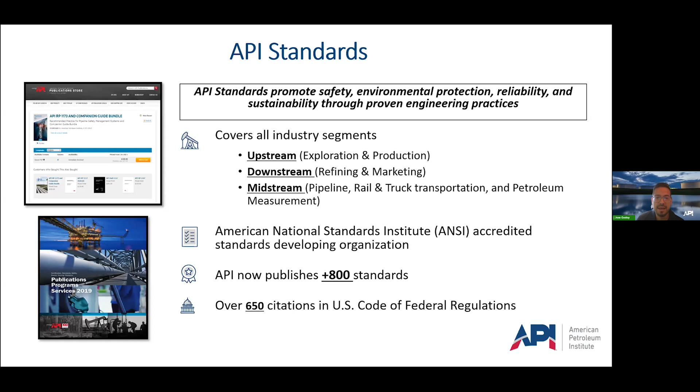We are also accredited by the American National Standards Institute, ANSI. We published so far over 800 standards with over 650 citations in the U.S. Code of Federal Regulations. Now, why is it important? Why do we emphasize participation?

One, because it gives companies a voice in the development of a standard, sort of a seat at the table. It allows experts to network with other experts and learn from their experiences, sharing lessons to prevent issues before they occur. You also get access to early information. So if you're part of the committee, you get to know how a standard is written, the position that that standard is going to take. You use knowledge to demonstrate compliance also with other industry standards and to your customers or regulators. And it's an opportunity for company personnel to gain expertise through consistent participation.

Now, the standards development process. Our standards development process is transparent, which means that anyone can participate and comment in a ballot that is opened. It's impartial, it's fair and just, and we incorporate balance and due process into our standards development. And it's consensus-based, meaning that any action taken has to be made by substantial agreement.

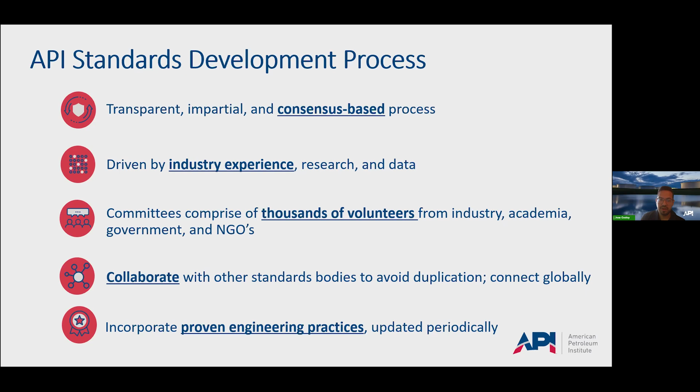Our process is driven by industry volunteers, experts that provide research and also provide data. Thousands of volunteers from operators, academia, government, NGOs. As long as you have a material interest in that particular standard, we welcome you. We collaborate with other standards development bodies to ensure that there's no duplication and that we connect globally. And we incorporate proven engineering practices that we update periodically. Now, just to talk a little bit about the documents that we have.

Before I talk about the individual documents that we have, I want to make sure that I'm clear with how we use the term standard. We use the term broadly, but what we're going to talk about now is our actual document designations and how each document is developed. And I want to also emphasize that there's no structural hierarchy with any of the documents I'm going to talk about now.

And then compliance with industry standards. All of our API documents are voluntary. They only become mandatory if they are codified by federal law or by a jurisdiction, or if they're part of a contract between two parties, say a manufacturer and a purchaser, or if they're part of a company's compliance procedures. And as I mentioned earlier, the document designation does not determine compliance. So we always encourage users to refer to the national and local regulations for that.

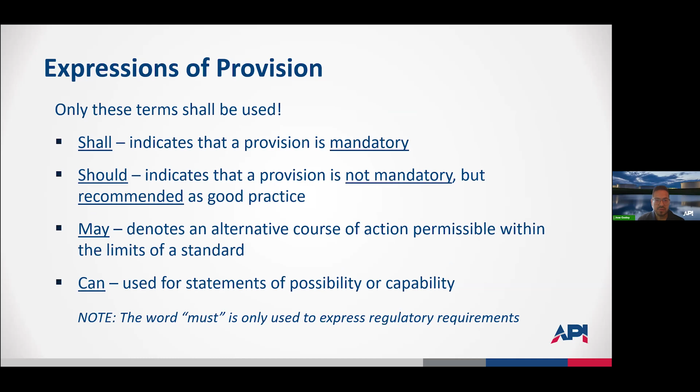The balloting is conducted using the API electronic system. Usually a ballot is open for 6 weeks, and it's distributed to the consensus body and everyone that has material interest in that document. Information on accessing copies of the ballot draft and submitting comments can also be found on the API website. And as I mentioned earlier, only one vote is allowed per company.

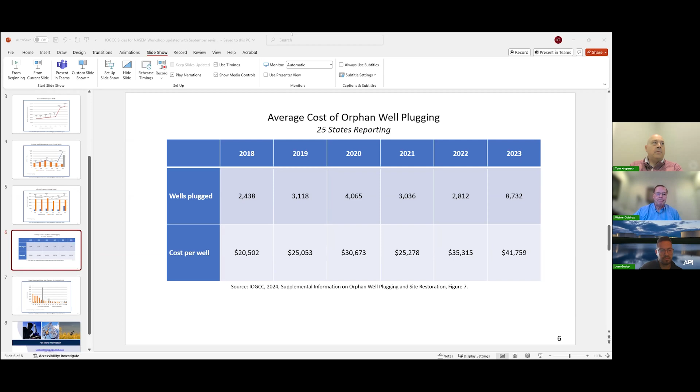Appreciate it. Thank you. David? Yeah. Hey, Tom. Thanks for presenting. I know you weren't here yesterday, so my question is kind of related to the previous one; it's around cost and presenting average costs.

We had Luke Plants, who is the P&A contractor, speak yesterday about the concerns when you go out to bid on a fixed rate basis when not all wells are average, right? So a well in Kansas is 800 feet, simplistic, versus the complex wells. So the contractor starts to take on that additional risk. And then the concern is, are you really getting adequate abandonment at the end of the day?

So my question is, does IOGCC break that down into other buckets, from simple low complexity wells to high complexity wells that are more expensive, but you get a bigger bang for your buck because you're reducing more risk, maybe more methane exposure and things like that than the other wells? So whether IOGCC has that kind of breakdown in data, or should we be tracking and trying to bucket the average cost to help better depict the overall cost exposure?

Good question, David. These numbers do not go into that level of detail, but it is something that I think some states look at and understand. Especially if you're doing a turnkey project, on those difficult wells it may be difficult for a contractor to get it done when you find unexpected issues, which is pretty common on an orphan plugging project. An example of that in Wyoming: we plug some of our orphan coal bed methane wells for $3,000 to $5,000. Our most expensive orphan well to plug to date is $500,000. So it can vary widely even within a state depending on the type of wells.

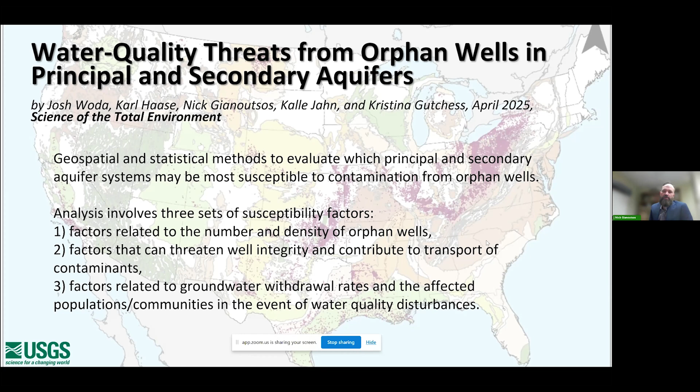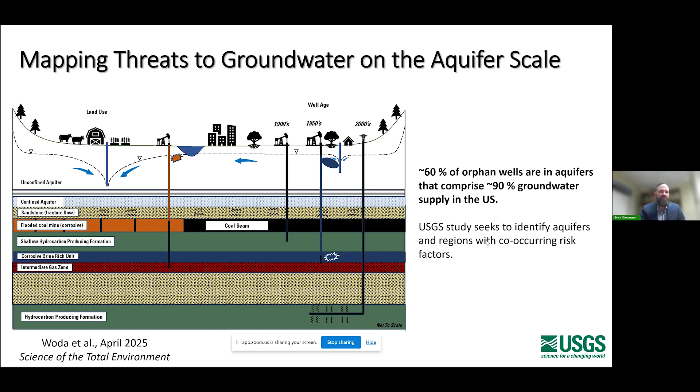We look at different susceptibility factors, including the number and density of orphan wells in each aquifer system, different factors that threaten well integrity, and also human factors like groundwater withdrawal in affected communities and populations. One of the key findings of our study is that approximately 60% of the orphan wells in the United States that we know of are in aquifer systems that comprise 90% of the groundwater supply in the United States. So 90% of our groundwater is where 60% of our known orphan wells are located.

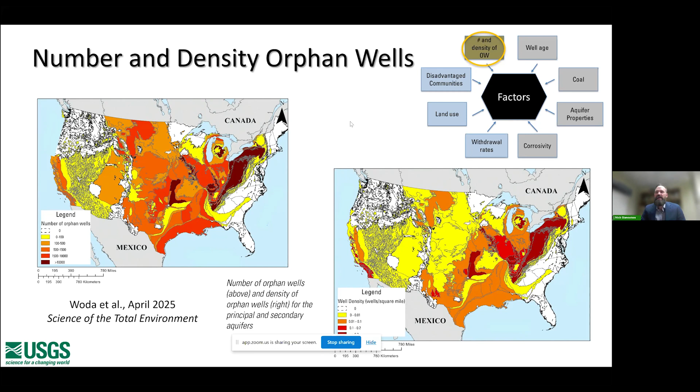And what we concluded is that the Pennsylvanian aquifers in the Appalachian Basin have the highest number of risk factors, which isn't very surprising because that's where the oldest wells are. That's where some of the largest volumes of wells are located. There's a lot of coal mining and other factors in the area.

A number of aquifers in the central part of the U.S. are actually lower risk based on these susceptibility factors. And then the blue, the yellow, and the purple aquifers are kind of a mix based on the different susceptibility factors. And so when we publish this study, it's kind of hard to tell which factors are the most important. So we introduce the data in a way so that the reader can decide which factors you think are most important and then see which aquifers line up with that.

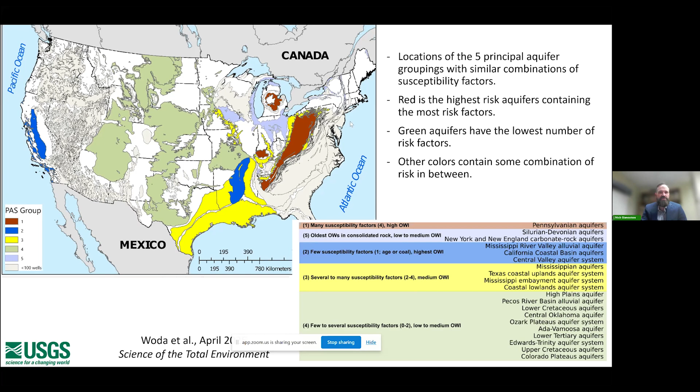So I want to thank Josh Woda for being the lead author on this study. He did a really excellent job, and we're excited to present it to you guys next week.

Okay, so last time I spoke in front of the committee was at the workshop in Washington, D.C., and I presented a new data set that we had just published. It's the groundwater quality near orphan wells. This data set is a combination of orphan wells and groundwater quality measurements from the National Water Information System of the USGS. And we look at things like total dissolved solids, chloride, bromide, different characteristics within the water quality measurements.

And so what we've done is we've created from that data set an online tool for the user to go in and to evaluate the data. And I'm going to give you a quick demonstration of that today.

Okay, hopefully you can still see my screen. Yes, we can. All right, thanks.

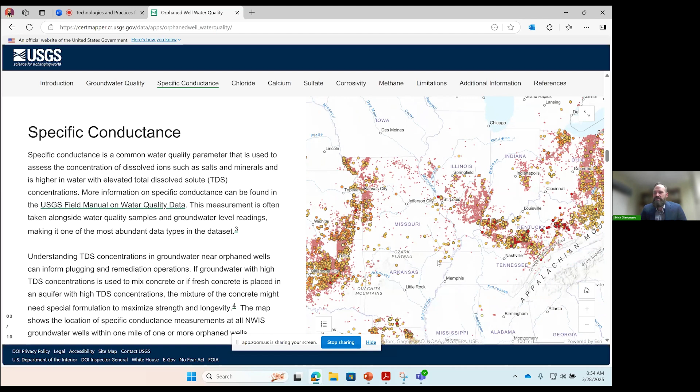And if you click on those points, you can see all the parameters of the different groundwater measurements that were taken. And then we've pulled out a couple different parameters for mapping. So we look at specific conductance across the US in this data set. You can see where total dissolved solids are higher and lower. We also look at chloride. Chloride can affect the deterioration of the wellbore over time.

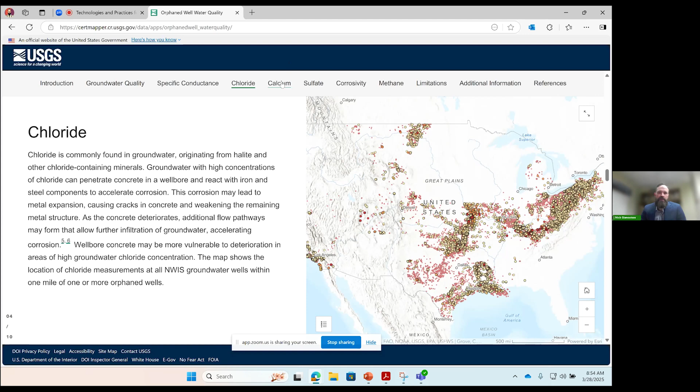We look at calcium. Calcium in groundwater is important for setting plugs because it can affect the timing of the curing of the cement in the plugs. And then lastly, we look at sulfate across the U.S. Sulfate can wear down concrete or cement over time and cause a deterioration of the well plugs.

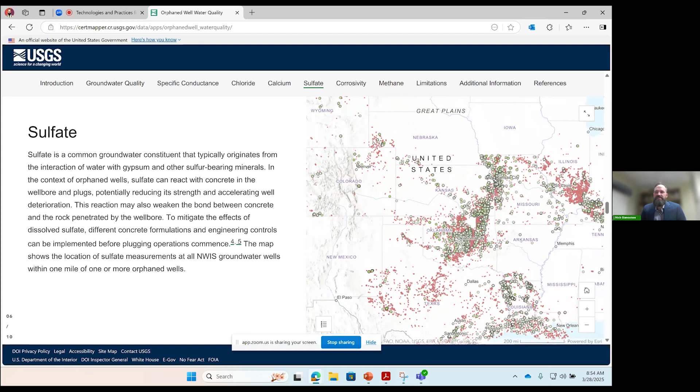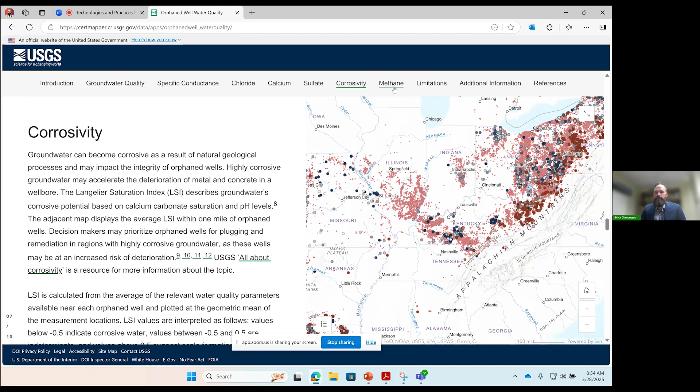And then we look at the Langelier saturation index to see what parts of the country are more corrosive than others. Well bores in these areas with the red dots are going to corrode at a faster rate than well bores in other areas of the country. And then the last thing we look at is methane in groundwater, areas where we're seeing higher amounts of methane.

Finding methane in groundwater does not indicate that that methane is coming specifically from an orphan well. There are natural sources of methane and other causes as well. But we hope that as researchers, policymakers, and well pluggers go out and are doing work across the country, this tool might be useful for you, that you can go in and see what these different parameters are and help you make decisions.

And then the final thing I'm going to talk about today is for this panel on monitoring and remediation. Noel had sent us some questions and some topics that the committee is interested in. And so I'm just going to highlight a couple of these in bold here. So the committee is interested in seeking information on long-term protection of the environment, specifically groundwater and methane emissions and public health and safety.

Some specific questions include what subsurface factors are most pertinent relative to failed wells, what strategies have been employed to mitigate them, groundwater monitoring, if well remediation is needed, how should it be done, what about post-plug monitoring? And so these are complicated questions. I wish I had simple answers.

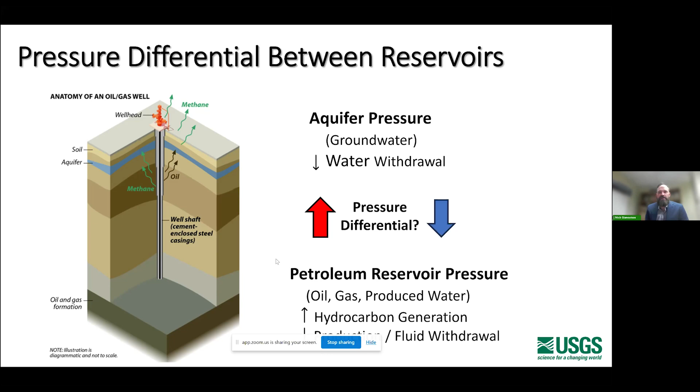But if we have a normally pressured aquifer and we've had a lot of production in a petroleum reservoir, there might actually be situations where the water from the aquifer might start draining or leaking down into the petroleum reservoir. And this can change over time as production occurs and groundwater withdrawal also occurs. So it's an extremely complex environment to try to understand and study.

Perfect, good. So Nick very nicely teed up what I'll present today, which is kind of a case study, but I hope that there will be learnings that are useful for the committee and the public, and that might be a bit more broadly applicable. So my name's Katie Smye. I'm the principal investigator for the Center for Injection and Seismicity Research, which is an industrial associates program at the University of Texas at Austin. And what I would like to talk about today is challenges to orphaned and abandoned well integrity from wastewater injection specifically. I'll touch a bit on some of the tools that we use to monitor surface conditions and what that tells us about the subsurface, and what we can learn about the effectiveness of plugging and remediation strategies.

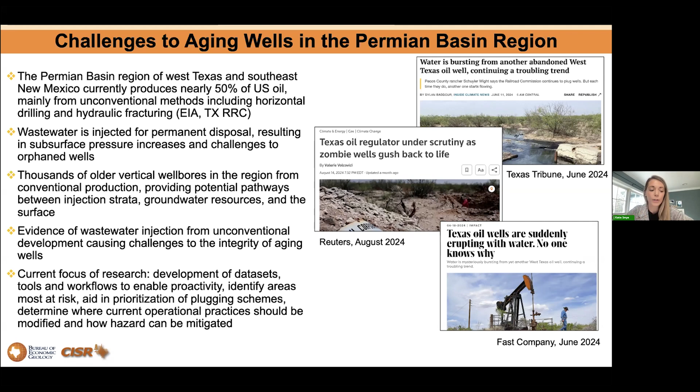So in terms of what's happening in this basin, a little bit of background, I won't spend a lot of time on this, but you'll be aware that in the Permian Basin, which has two sub-basins, the Delaware and Midland basins, and an uplifted Central Basin Platform, there's a long history of conventional oil and gas production, and I'll show some of those maps of those wells later. That production peaked many decades ago and has since declined.

And the footprint here of unconventional produced water differs from the footprint of conventional produced water. That was conventionally typically not a huge challenge for orphan and abandoned wellbore integrity because that produced water was re-injected into the same reservoirs it was produced from for enhanced oil recovery. So this is kind of a historically pressure-balanced technique for managing water production. In the unconventional reservoirs, they're injected into other strata, and that poses challenges for pressurization in the subsurface.

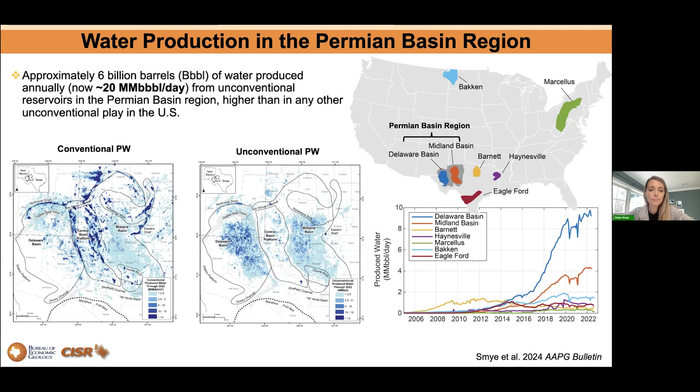In most cases, for every barrel of oil produced here, we get 3 or 4 barrels of water, but in some areas, 90% of the fluids produced are this wastewater. And this is not particularly clean water. It has to be very heavily cleaned to do anything beneficially with it. It's many times saltier than seawater. It contains radioactive materials. It contains organic compounds. So this is not something that you want necessarily sitting on the ground surface. So that is re-injected historically into deep reservoirs.

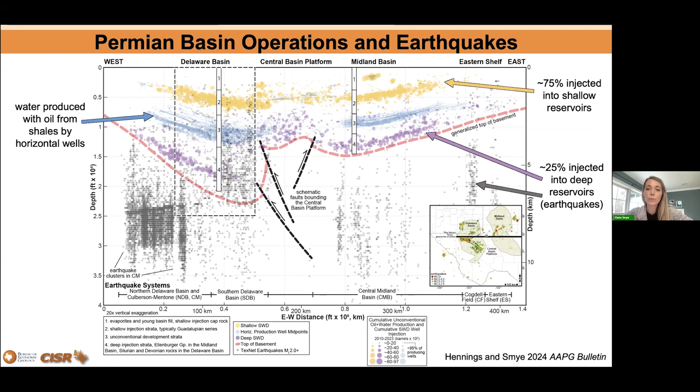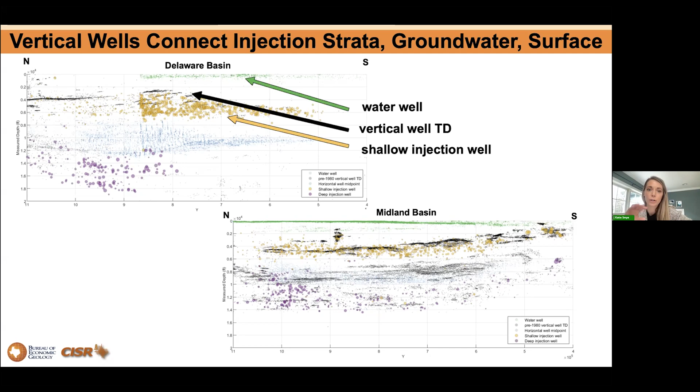in structural traps on the basin margins, there are a population of wells in the footprint of current day unconventional production and water injection. And many of those are in the depth range of current injection, 3, 4, 5,000 feet in the shallow strata. And many of them are of a vintage 60s, 70s, and 80s that might be of concern for being potential compromised integrity locations.

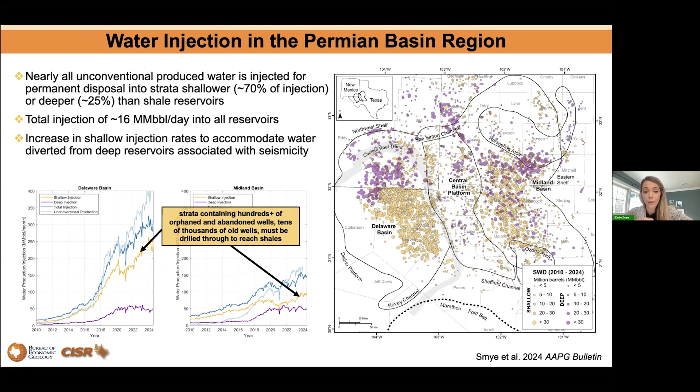And to just put that in a useful kind of context, if that injection was spread out across every minute of the day, we would see an Olympic-sized swimming pool every minute and a half or so injected in the subsurface of this basin. Every hour of every day of the entire year. So you can understand the vast volumes of water that are going back into the subsurface here and coming into contact with well bores that were not cased or plugged either at all or to modern day standards.

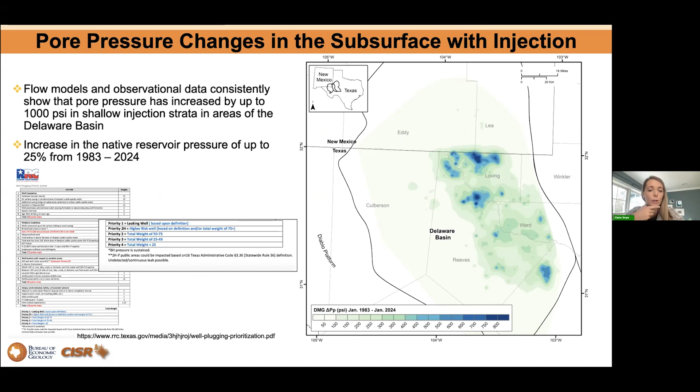And I just threw this up there during the earlier morning sessions today, the plugging priorities for Texas before I bring up the next slide. There are a range of factors that are considered in prioritizing plugging, but what I want you to see here is that priority one wells for plugging are wells that are actively leaking at the ground surface, either methane or in most cases, produced water. So priority one wells we know are actively leaking.

And so with our pressure maps, I wanted to show you we did a study on several hundred orphaned wells in Texas based on the Texas plugging priority by the regulator. And you can see in black dots, many wells don't have a priority at all.

They're not currently prioritized for plugging, but there are a population of wells that are priority one for plugging. Those are the red dots. And when we compare that to our subsurface shallow injection pressure model, we can see that leaking wells have experienced an average pressure increase of more than 200 psi.

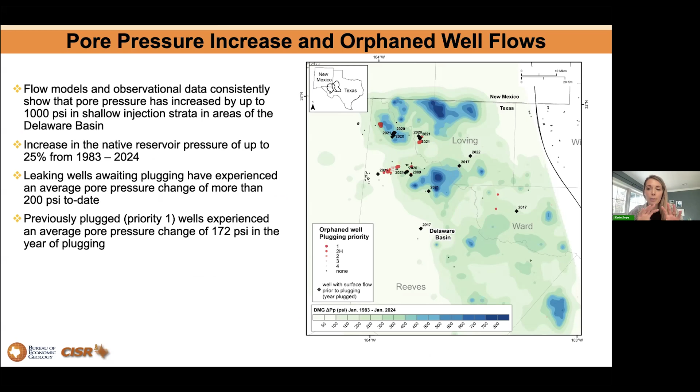And when we layer on wells that were previously plugged, and here I have the year of plugging for each of those wells, these are the wells that are black diamonds, they did experience an average of 172 psi pressure increase in the year of plugging. So it's clear here that there is a link between this subsurface pressure increase and leaking orphaned wells produced water at the surface. But building those geological models and pore pressure models is extraordinarily complex, takes a lot of time and data and man hours.

So we're looking at other techniques now to monitor what's happening in the subsurface and potentially highlight areas of concern. And so one of those things is InSAR surface deformation data. And this is gleaned from the Sentinel satellites that pass over this region of West Texas every 12 days or so. And they can monitor the elevation of the ground surface. And we can calculate over a specific time period how the elevation of the ground surface has changed.

So the map I'm showing here, you can see two paths stitched together. There's a line between the two basins, but it shows the change in ground surface elevation from 2015 through 2022 over this 7-year period. Purple areas are where the surface is going down, subsiding, and orange areas are where the ground surface is coming up or uplifting. And in general, there's a signal of subsidence. That's because we're producing, as Nick mentioned earlier, fluids from the subsurface. And like sucking something out of the ground with a straw, you're removing the fluids and there's compaction of the reservoir and the ground surface goes down.

But if you look closely, you can see there are some areas, particularly right here along the Texas-New Mexico state line and other isolated areas as well where we see uplift of the ground surface. And those are areas we think where shallow injection pressurization is so great that it's overcoming that signal of subsidence from production and causing elevation of the ground surface to go up. And these are the areas where we have concerns about surface flows from orphaned and abandoned wells. So I want to show you just quickly two case studies and how we're using this particular tool to monitor the subsurface and what's happening.

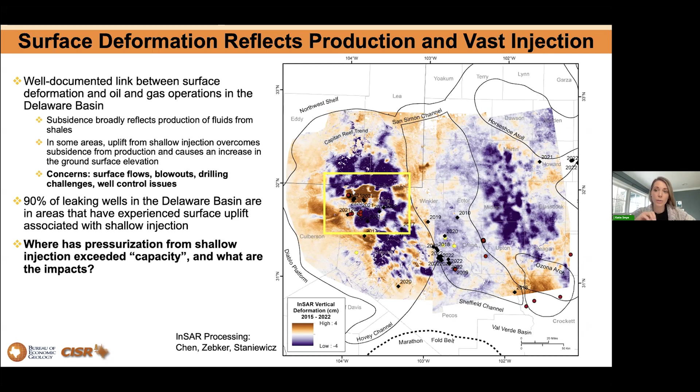We built a detailed model here, understanding the geology, the injection wells, the aging vertical well bores, the incidence, and the surface deformation to calculate something that we call injection capacity. And so we think that this is a workflow or a method that can tell us where injection capacity in the subsurface has been exceeded and how well that links to orphan and abandoned wells. So there's a lot of geologic and engineering modeling that goes into this. But what we end up with is what you see on the bottom right, an understanding of injection capacity.

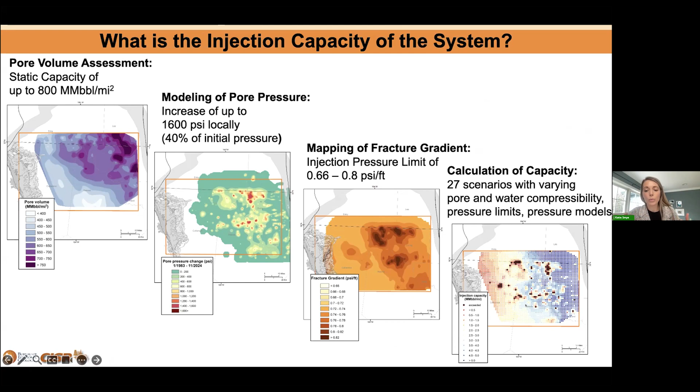And we note that there are many areas where injection into these shallow reservoirs has exceeded the ability of the reservoirs to maintain that pressure increase. And we find that many of these areas are linked with areas where we have surface flows and well blowouts. Okay, I want to show you just one more case here before I wrap up.

You might have noticed these little dots of surface uplift in Crane County in Texas, and I wanted to talk about how we're using this to try to understand the effects in the subsurface of well plugging and therefore the efficacy of plugging programs, or the success, I should say.

So when we zoom in on that area, we see that there are many orphaned and abandoned wells in this area that are actively leaking at the surface. And so immediately we would look at this surface uplift and say, this is potentially an area of concern because we know that there are aging vertical well bores in this region.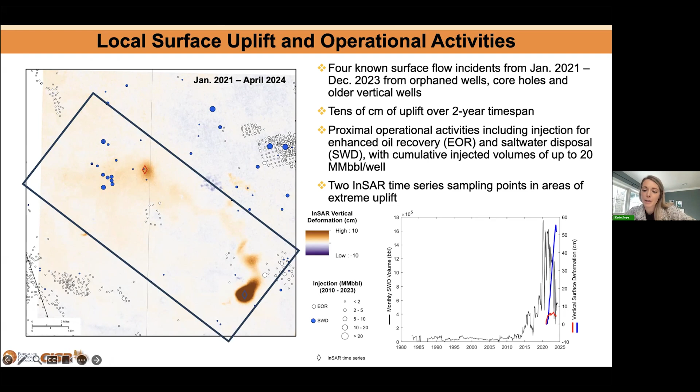So we are going to track the time series of the change in elevation of the ground surface at two points, the red diamond here to the northwest and the blue diamond to the southeast, two of these areas where we have strong surface uplift signals. We are also tracking here the monthly volumes of saltwater disposal in this region.

So if we look first at May 2021, so this is just a few months into our analysis, we've already had one surface flow from an older vertical wellbore here to the south. This particular area hadn't seen a lot of uplift, but we have a lot of offset injection that's already occurred. You can see that increase. And we have some surface uplift as denoted at the red point here. So a little bit distal from this region.

As we move to the next event, that event is occurring very close to our blue data point. And you can see prior to that well blowout, we had seen many centimeters of surface uplift occurring before that well blowout even happened. And then interestingly, as that well blowout occurred, you see that uplift plateaued. So there was a release of the pressure from the subsurface from that orphaned well, and the pressure dissipated in the subsurface.

But of course, that well was then plugged, but that well was plugged while injection operations were still occurring. You can see the monthly injection volumes happening. So when the well was plugged, surface uplift increased at that point yet again.

As we move through in time, we had another event close to the red point. You can see that surface release again resulted in the ground surface elevation subsiding a bit, but it came back up again. And then finally, the last event, which occurred in December of 2023, and this was a very problematic well to be plugged in light of the pressure increases and the surface uplift that had occurred.

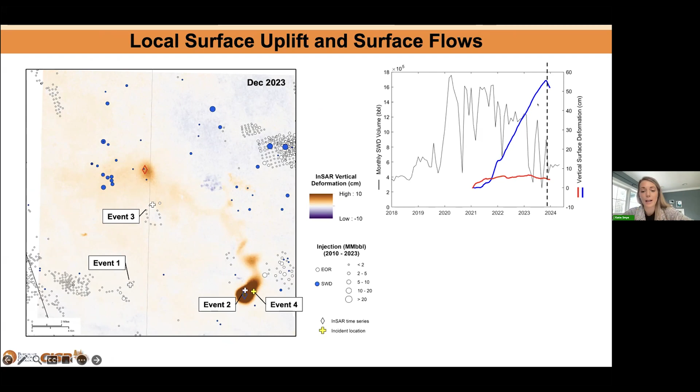So I wanted to show this case study just to say that in the cases of plugging these orphan and abandoned wells and older vertical well bores, if the subsurface conditions that potentially precipitated those blowouts or those surface leaks are not dealt with, we may see surface uplift and continued blowouts in those areas.

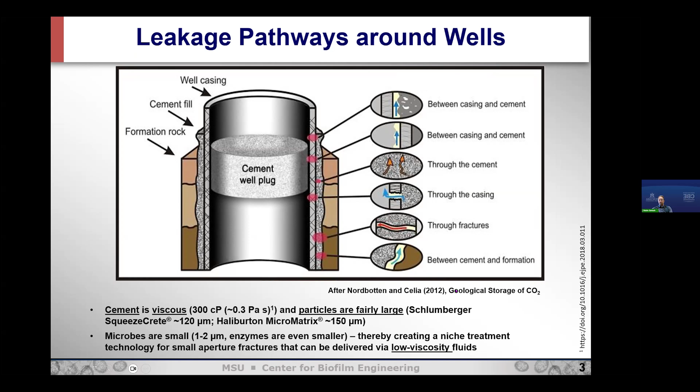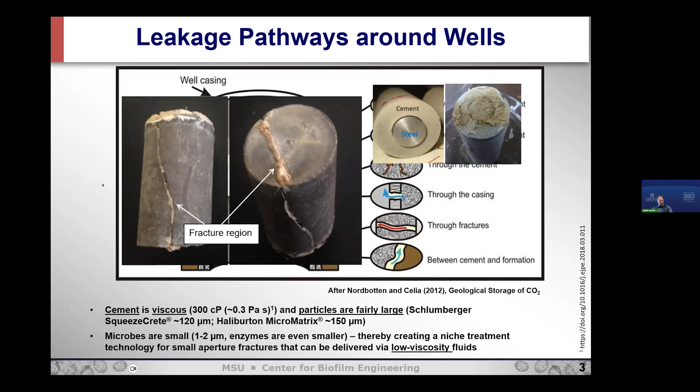How does this treatment occur? Well, we use an enzyme that can either be bacterially or plant produced. And we hydrolyze urea to produce ammonia and carbonic acid. The ammonia then functions as a Bronsted-Lowry base, increasing the pH. And the carbonic acid turns into carbonate. And if there's calcium around, we precipitate out calcium carbonate. And this is what we call a biocement. And you'll see that this can seal all sorts of permeable media.

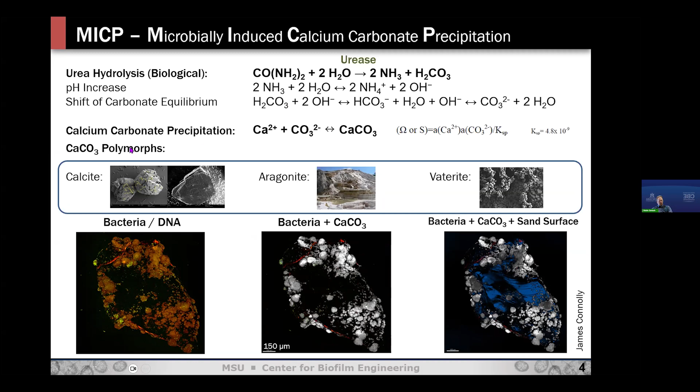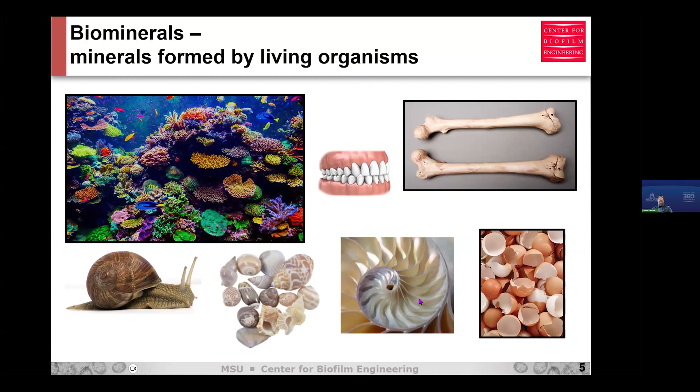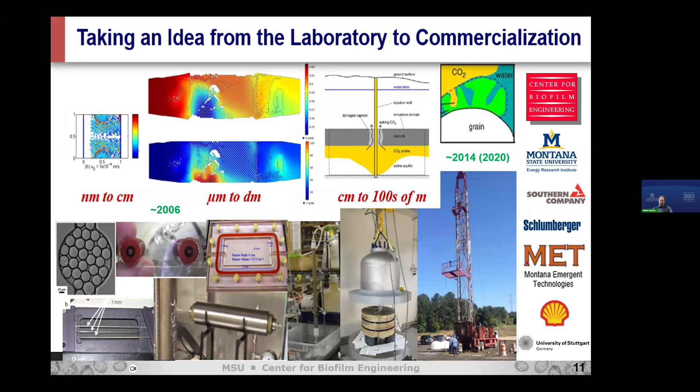This is a large high pressure vessel that's about 80 centimeters or so in diameter that had a large sandstone core, and I'll show that in a second again. This was, of course, not done in isolation. Schlumberger, Southern Company, MET, Shell, and Loudon Technologies, who Jim is the principal of, were involved in this. And this happened kind of during the time when Jim transitioned out of Schlumberger.

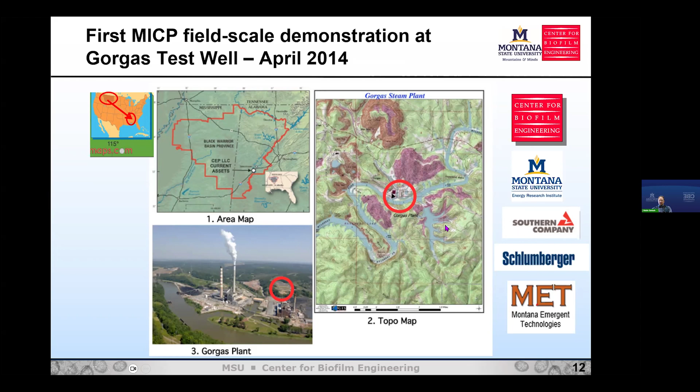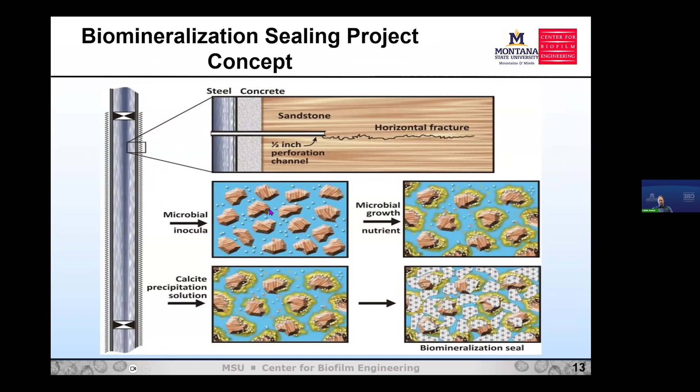So to make a long story short, in 2014, after about 6-8 years of doing this, we had access to a site at the Gorgas power plant to a test well that was drilled with DOE funds. It was kind of up here above the plant. And together with Jim, Schlumberger, folks from MET, and Southern Company, we were able to access a well. And our concept was to basically create a fracture in a sandstone layer and then use our biocementation to seal that sandstone layer. And lo and behold, it worked.

We basically predicted through a model that it would take about 25 calcium and 6 inoculation injections with our bacteria that perform hydrolysis of urea. And we were very close to that prediction. That's when we started not being able to inject anymore below that pressure that we had set as the maximum pressure. And when we refractured the formation, and Jim could talk about this more eloquently, we actually needed a higher fracture extension pressure after biomineralization sealing, indicating that we actually made the sandstone, in a nutshell, stronger.

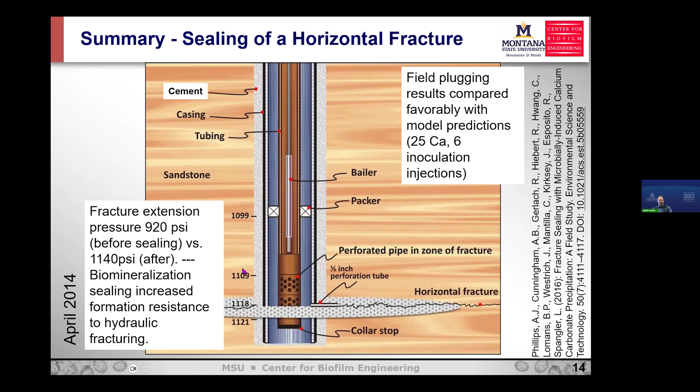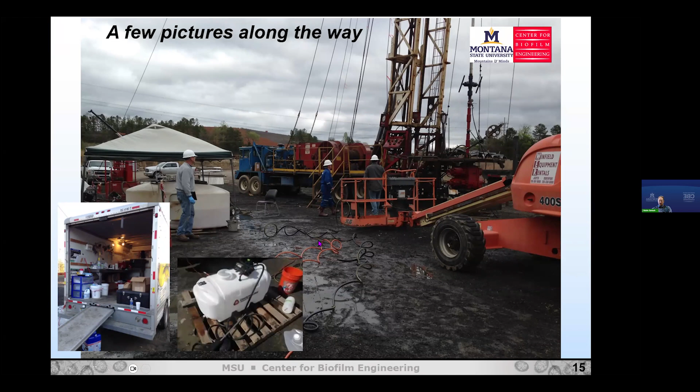So this is how it looked. Wasn't the best weather. We made it through it. We had our U-Haul van as our field lab and prep lab. We had our weed sprayer, and we used that to pump our biomineralization fluids and our bacteria into a 30-foot bailer that had a little valve on the bottom that was secured with a pin. And once it hit the collar stop, it opened up and we released this.

And you saw we did this about 30 times with the biomineralization solution and the bacteria. And this guy from Schlumberger had to keep going up the man lift, doing this about 30 times. This was our very first time we did this in 2014. We did this a total of about 5 times, and I'll show a little more about this here in a second.

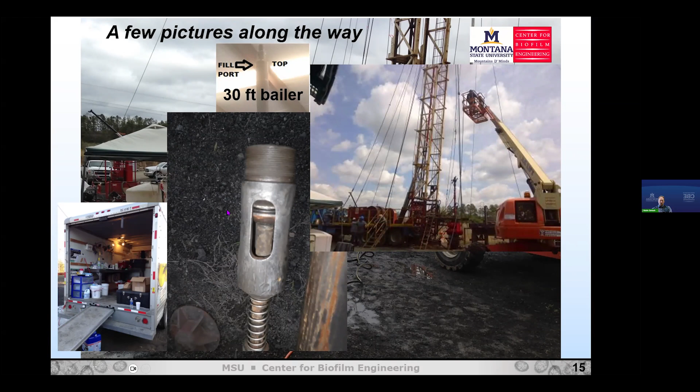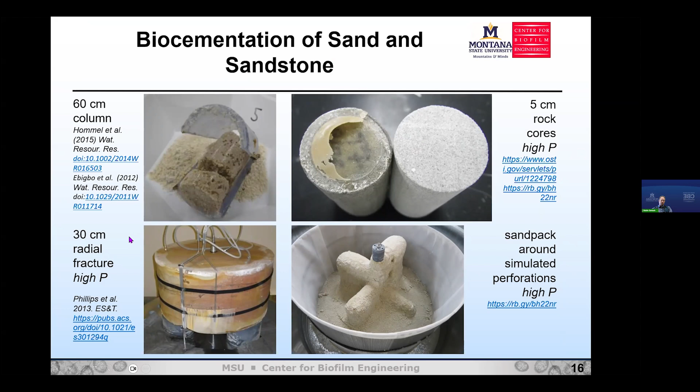On sandstone, really fine pores, we mostly form kind of a seal, and that makes sense when we think about the sandstone fracture at the well, that we were not able to inject anymore because we probably formed this film along the fracture, so we couldn't inject in the sandstone anymore unless we used really high pressures. The second experiment was more focused on leakage.

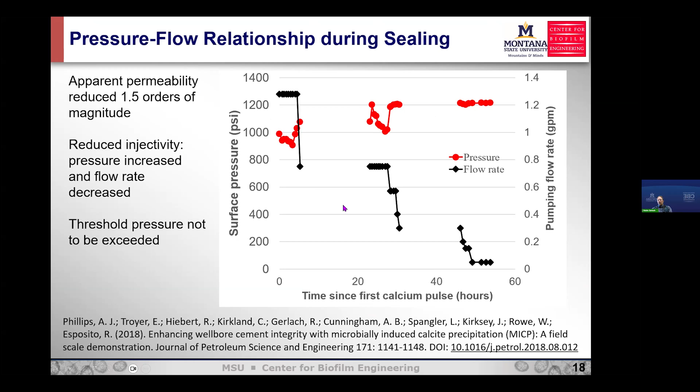And once we were done, we performed basically a shut-in test, and these two would actually pass the Texas Railroad Commission criteria for injection disposal wells. It also passes other tests, but this is the one that I put on here. So we pressurized the well to either 300 or 500 psi, and our pressure loss was less than 10% after, oh, excuse me, that's after 30 minutes. So it did pass it. So I'm just seeing this now.

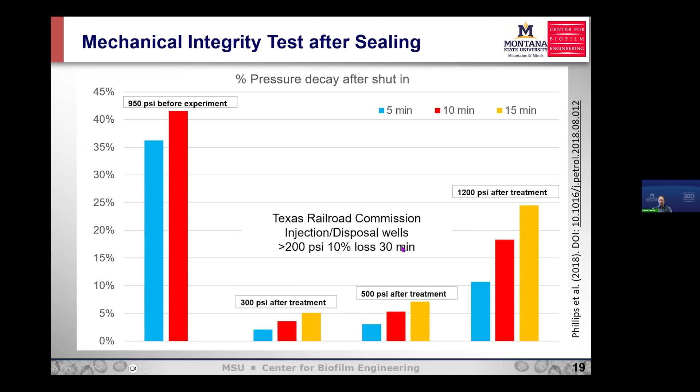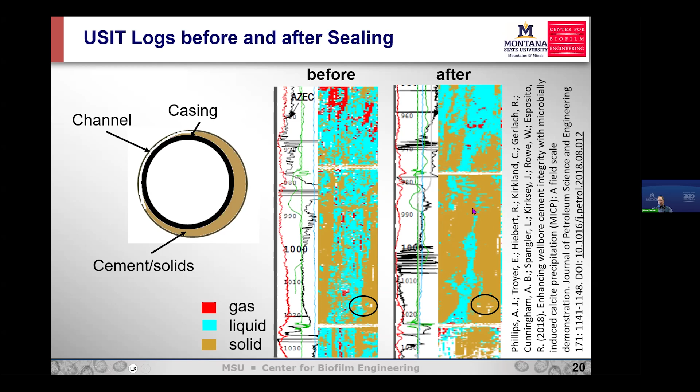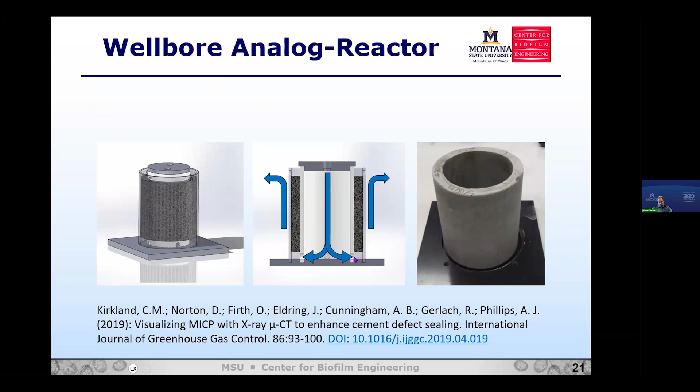To visualize this, we had a wellbore analog. This is about 4 inches in diameter. We were able to inject through the middle, then we had the perforations. And if you look at it, we dremeled in a little defect that we visualized here with fluorescein. And after the biomineralization treatment of 5 days, we reduced the overall permeability of the system by about 5 orders of magnitude. And this is available in this publication, and I have the references at the end of the presentation.

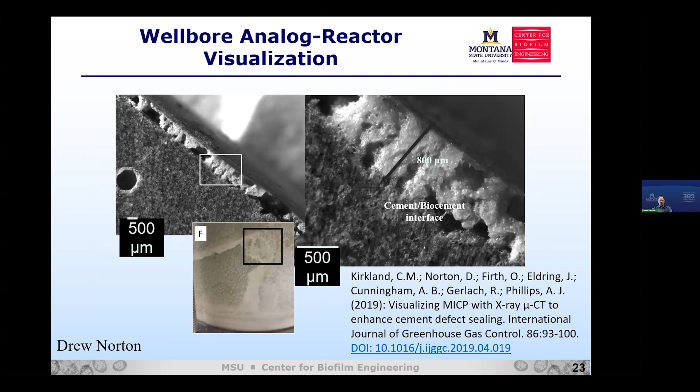What got me really excited was when we dissected this, that the biomineral actually looks like it really integrates with the cement, the cement being here, the biomineral being here, the plexiglass being here. And it looks like there's a really strong bond potentially between the biocement, this calcium carbonate, and the well cement. So that indicates that we have good bonding, and that might explain why we have higher fracturing pressures after the treatment in sandstone.

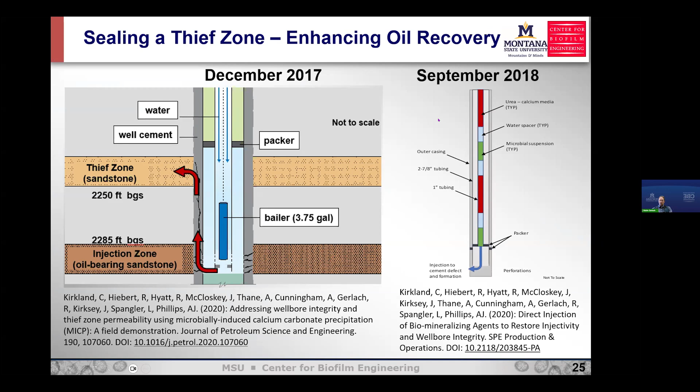We also, again, with Jim's and other people's help, were able to do this on a more production type of well. This well had a thief zone about 30 or so feet above the oil-bearing formation. And we went in there twice, once with a bailer that I showed you, and once with a tubing stacking system. And what you can see is with the bailer, we were able to reduce the flow-pressure ratio, and we are looking at cumulative volume injected.

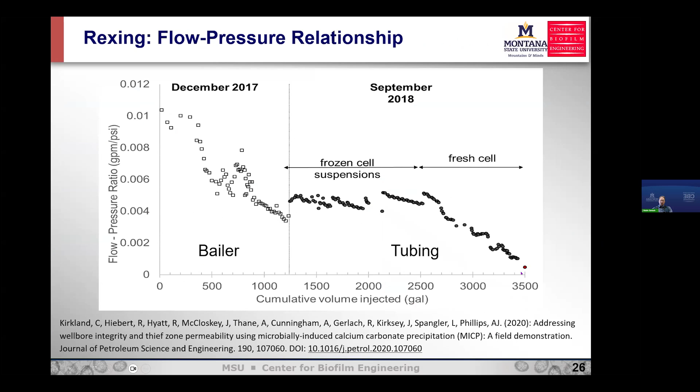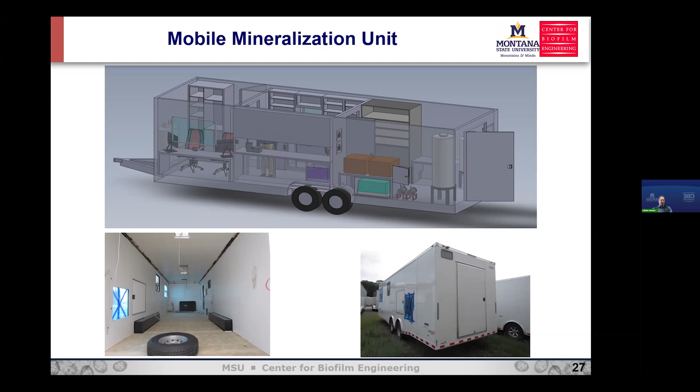So with that, I do want to point out that this involves a lot of people. And again, Jim, you'll hear from him later on. He was an instrumental part of this. MET, which is a precursor of BioSqueeze, had a major contribution to this, and Southern Company, without them, we would have never been able to do this.

Now, I want to point out one more thing, if I may, that actually doesn't relate to well sealing, but might be relevant to folks here. We are now looking more at using biomineralization for stabilization, including building new materials. This is an NSF-sponsored project. This is one of our grad students who's balancing on one of these bio bricks that we made the same way that we sealed these wells, and it bears his whole weight. So we are getting to a point where we can stabilize things.

And I don't know how relevant this is, except for wellbore stability if they aren't cased. But I did want to point out that this is something where biomineralization might or might not have other implications and uses to folks who are around here. We're looking at other ways of doing this.

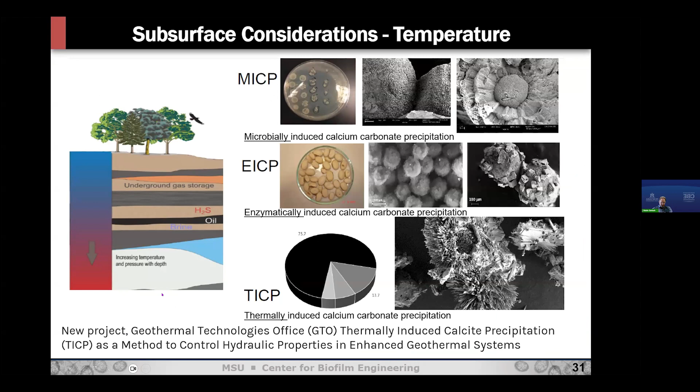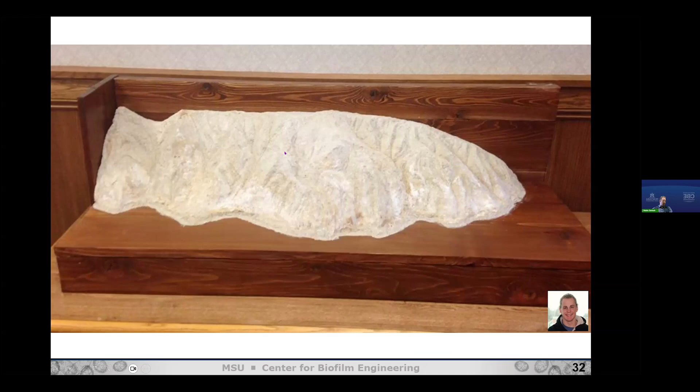We've mostly been doing the microbially induced. We've used enzymes. We've also used thermally induced ureolysis to produce minerals. And we're currently working on a geothermal project. And this is a replica biomineralized of our home range that we have. This is about 3 feet by 1 foot by 1 foot. So we can build larger things even at a university. And here you can see our bobcat.

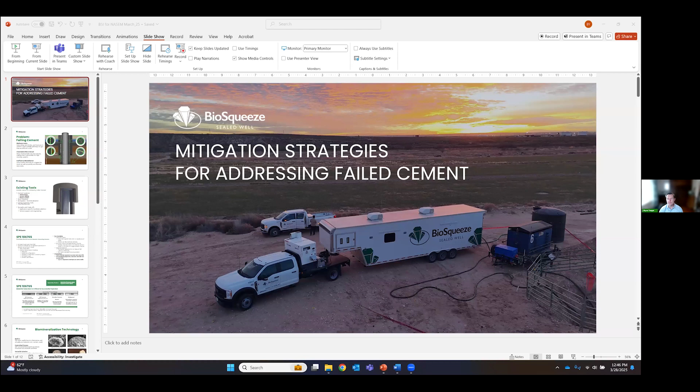So I'm Bryce Yeager. I'm Vice President for the Eastern U.S. for BioSqueeze. I'd like to thank the committee for inviting us to present today. I also like to thank Robin for his presentation and really providing a luxury for me in that I don't have to go through the ins and outs of MICP, being that we are a company that effectively utilizes biomineralization to seal leaking oil and gas wells. So from the original iteration and design that Robin showed for a biomineralization field trailer, we're now on our 3rd generation, which is shown in the picture here.

So for all the reasons that we know, cement leaks when used in a downhole environment, whether it's because of debonding from casing, debonding from the formation, or cracking or gas channeling while being set, leaks do occur. And when they occur in the annular space or when they occur up the casing, they need to be remediated. And when moving an orphan well to being fully plugged and bubble tight, this presents quite a few issues with properly sealing a wellbore in that process.

So there are several tools that are existing on the market. Some of those involve placing cement into some of the void spaces behind casing. Some of those, such as section milling or rotary cutters, involve removing a section of casing in order to place cement or perhaps resin in that space in hopes to create a seal. Biomineralization is a rather new but effective tool. Also, casing expansion is utilized to enlarge casing and return a seal between casing and existing cement behind the well.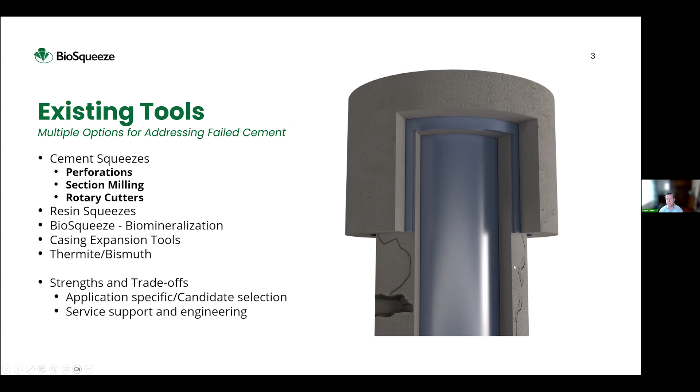I like to utilize this image off to the right of a wellbore and the different size void spaces in the cement. Here we can see a large void which can be filled with bulk application of one material, but some of the more complex pathways, smaller pathways, can be difficult to seal with rather viscous materials.

One tool that we like to use is referencing an SPE paper that was published in 2007 by Micheal Cowan at Shell. Really enjoy this paper in that it contains a data set of 137 squeezes that were performed in a West Texas field on producing wells. But while analyzing 51 different fields in that data set, they used multivariate analysis to really hone in on what the first order variables are around success.

And from that, they created some rules of thumb and design factors to utilize when designing cement squeezes for behind casing, one of which is injectivity factor, and I'll talk about that a bit more on the next slide. Another one is a recommended cement volume based off of the injectivity factor and the desired length of cement behind casing.

And the third that I want to highlight is squeeze pressure, in that most times, in order to effectively place cement behind casing in the right application, a significant amount of pressure isn't required, but rather a low pressure is desirable so you don't break down any weaker formations in proximity to the wellbore and lose that height of cement behind casing.

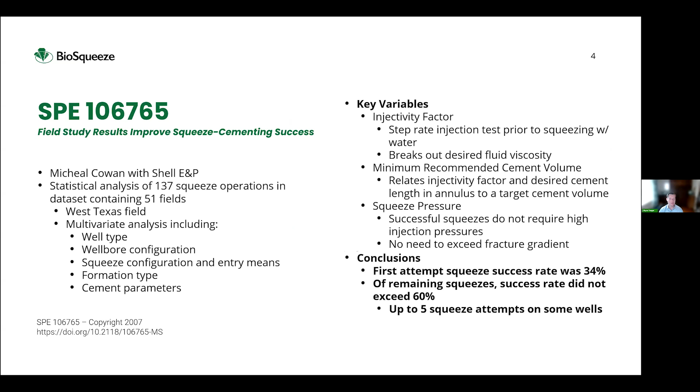Of the remaining 2/3 of squeezes, with up to 5 attempts, that success rate never climbed above 60%. So really highlighting the fact that cement is not always the right tool to create that seal in a downhole environment. The injectivity factor that's highlighted in the paper is rather simple, and it translates to the field very well, in that the injectivity factor is just injection pressure in PSI divided by the effective injection rate in barrels per minute. And that can be related to the relative size of the pathway trying to be sealed behind casing.

Looking at different cement blends and the relative particle size within each one of those blends, the paper relates back to the injectivity factor. As you can see, as we move to the right, the injectivity factor is increasing, and the relative particle size of the recommended cement blend is decreasing. So we find ourselves in the 2,500 to 3,500 range, where they're recommending solely microfine cements, not regular grind API cements.

In addition to the work done in the paper, we've extrapolated and included additional products that are newer to the market, including resins and also biomineralization for some of the higher injectivity factors. I want to highlight that viscosity becomes a concern when injecting a viscous material into a very small pathway.

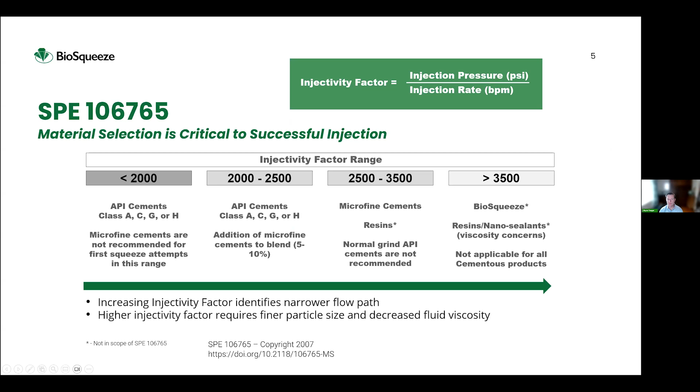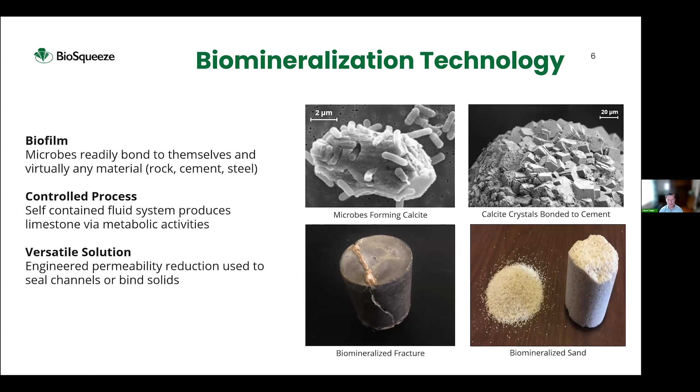So maybe some familiar images on this slide through the collaboration with Robin and Jim at Montana State and Montana Tech. I'm not going to spend a lot of time on this slide, but focus more on some of the lessons that we've learned in using biomineralization in the field, and how that interaction actually takes place downhole. So when injecting a biomineralization fluid into an existing cement sheath behind casing, we find that the decreased viscosity of the fluid, being around 1.05 centipoise, allows for deeper penetration into that cement sheath to create that seal.

Once the process is completed, that wellbore is left full drift, fully open, to allow for re-entry or setting of additional cement plugs to work your way out of the hole. And also, as the fluid begins to seal off the path of least resistance behind casing, we find that the fluid becomes self-diverting and will flow to the new path of least resistance, sometimes effectively creating a seal both up and down in the well from the point of entry.

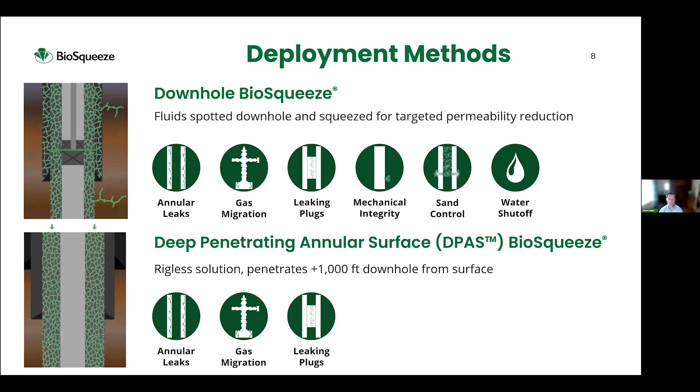And because of that delayed time frame before the deposition process begins, we can achieve a significant depth of penetration on the order of hundreds to the low thousands of feet into the cement sheath before the seal is created, effectively creating a seal downhole, but leaving that pathway open above for any residual venting of trapped pressure to surface.

So biomineralization fluids are applied in stages. So multiple injections are conducted so that the bacteria can coat the walls of the pathway, begin the deposition process, and build up the calcium carbonate on the walls of that pathway until effectively sealing off the pathway. This occurs over multiple days, and as I mentioned earlier, occurs well below a 1 gallon per minute injection rate.

So here on the first day, we can see working our way up to a constant pressure, or the maximum injection pressure for this treatment, at 700 psi. The injection rate began at a 0.09 gallon per minute rate, and as that pathway becomes fully saturated and the sealing process continues, you can see the decrease in injection rate at a constant pressure.

At some point, we replenish fresh bacteria and biomineralization fluid to the end of that tubing string and begin a second stage of injection. Maybe from day 1 to day 2, we can see that decrease in injection rate, which is the indicator of the sealing process taking place. And through subsequent injections, we see continued decrease in injection rate.

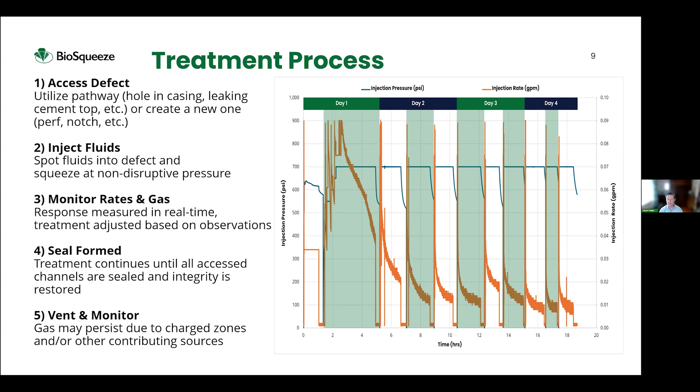Here in the middle of day 3, we see a small step up in injection rate, which we interpret as a breakthrough into a new pathway and self-diversion of the fluid system. We continue the process until we fall consistently below a 0.01 gallon per minute injection rate, at which point we call the pathway effectively sealed. After this point, we recommend a monitoring period for any residual gas to work its way out of the pathways behind casing, express at surface, and then ultimately fall off and die.

I do have one case history I'd like to share with the group. This is our first orphan well that we plugged. This was just outside of Cleveland, Ohio. This well was actually drilled prior to World War II, and all of the casing strings were removed as part of the scrap effort during the war. The state regulator that was overseeing this work came in, did some diagnostics on the status of the hole. Ultimately, they installed a casing string so that they could reach the obtainable bottom of this well. They cemented the casing string in place and started setting cement plugs up to the shoe of that casing string.

At that point, they noticed there was significant bubbling on the outside of the 7-inch string that was set in the well. That's when we became involved in the process and identified this as a good candidate for our DPAS system, which is our deep penetrating annular surface, which can be applied from surface. That gave them the confidence to continue setting cement plugs inside of the 7-inch string so that they could finish up with the rig, move the rig to the next location, continue on with their program on time.

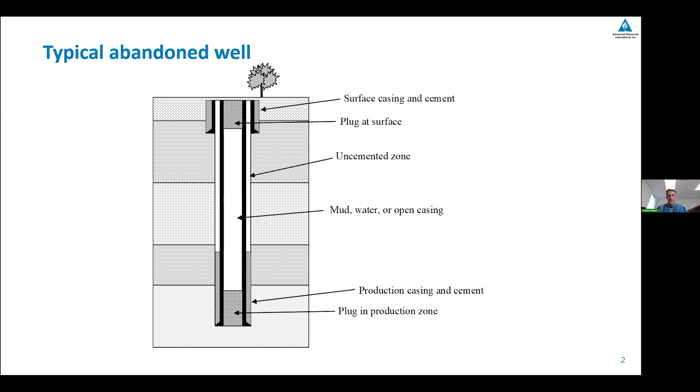So what I did want to do is walk through the stuff that I see that these technologies need to be used for. And you may have had this yesterday, and I only have about 4 slides. Jim kind of teed this up. A typical abandoned well, not a CCS well or some kind of specialized well, has effectively cement at the bottom and cement at the top and not cement in between. It is a really simple way to put it. And that leads to a lot of areas where fluids can leak between zones or make their way to the surface. So this is just a section of the previous well, and in here we've included a plug.

But you can kind of summarize leakage as stuff leaks through the cement or stuff leaks around the cement. I mean, it is really that simple. You can dig a lot deeper into it. Cement itself is really impermeable. So through the cement is not typically a big deal unless there's something wrong with your cement.

You can end up with mud on one side of the casing. You can have poorly placed cement. And that can lead to a leakage pathway. In addition, if you don't design your cement right, you may have gas migration while your cement is setting, which is also a leakage pathway. And then operating the well can cause its own leakage pathway through cracks, through thermomechanical cracks. You could create microannuli, which could be created during cementing or operations. But all of these are ways that you go around the cement.

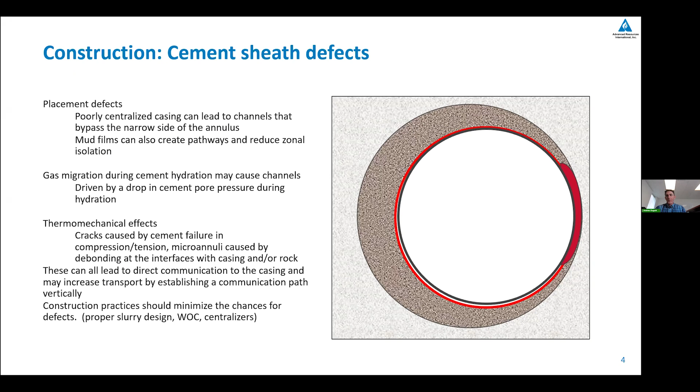So the thing I think that has to be kept in mind when these technologies are coming online is how do I get this plugging technology or well remediation technology to follow the same pathways. And I wanted just a little bit to show how we see these pathways, because some of them you really can't see. It was interesting, and I wasn't on yesterday because I was on an airplane the entirety of the day, to hear that an estimate of 40% of wells have defects, because I would estimate that 100% of wells have defects. But some of those defects aren't deal breakers, and often that's the case. You will find a defect somewhere in your well, and hopefully that defect isn't something you have to go fix, but you will find something everywhere.

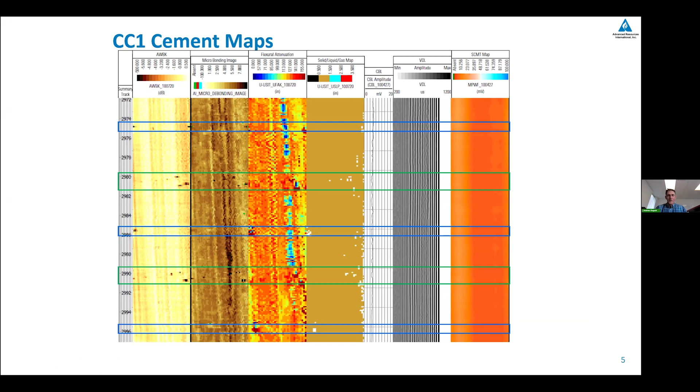And so my research in the past has been cutting up wells in the field, and doing other tests. And I'm going to get to a couple of pictures of things that were recovered from wells to kind of show what we're dealing with firsthand. But the other thing that can happen, and I mentioned that, if your cement is good, you won't go around it. But this was some work we did in 2013 where we pressured up a well that we'd perforated. And what was reading is solid cement.

So over here, if you can see my cursor, where you've got this green and green through brown to black. Schlumberger or another service company, and I was Schlumberger when we did this, would tell you that is all solid cement. And we pressured up. We were going to run an interference test, and lo and behold, a lot of that green stuff disappeared, meaning it wasn't solid. So even though the log indicated we had something solid there, it wasn't. So interpretation of what you have behind casing is going to be as big a challenge as figuring out how to put the remedial technology there and what that remedial technology should be.

I think this is my last slide beyond one that says thank you. And let me minimize so I can see, there we go.

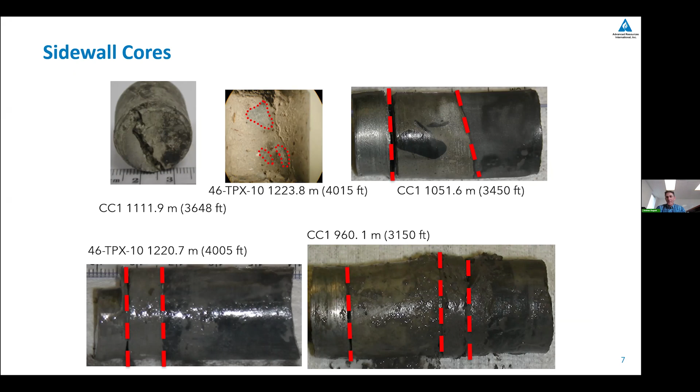The thought at the time when we wrote that first slide was that it would be a thin layer, not a thick layer. But drilling mud is going to be potentially somewhat problematic because it's still going to take up space. So something that you try to pump through there, it may not push that out of the way, and you still may get some kind of leakage pathway in that area. But I thought it was worth showing the visuals of what these look like.

I apologize that I said yes before I realized what I was saying yes to, but I'm fairly confident that I can be part of this conversation and give some insight. So with that, thank you.

Thank you, Andrew. Well, a lot of great information here. I'm guessing we're going to have people that want to get into questions. So let me give the committee a chance. I'll tell you what, while the committee's thinking about some ideas, I'll go to Maleva, and then we do have one audience question, but let me go to Maleva first here. Okay, great. Thank you, everyone. This was like what I've been waiting for. It's a topic that I'm very passionate and care about.

So, question for, I guess, all the biomineralization presenters is on how sensitive this biomineralization is to the chemistry of the fluids in the formation and in the area where they're being placed. And then the second, have there been any tests on the chemical stability of these carbonates that form calcites in this case?